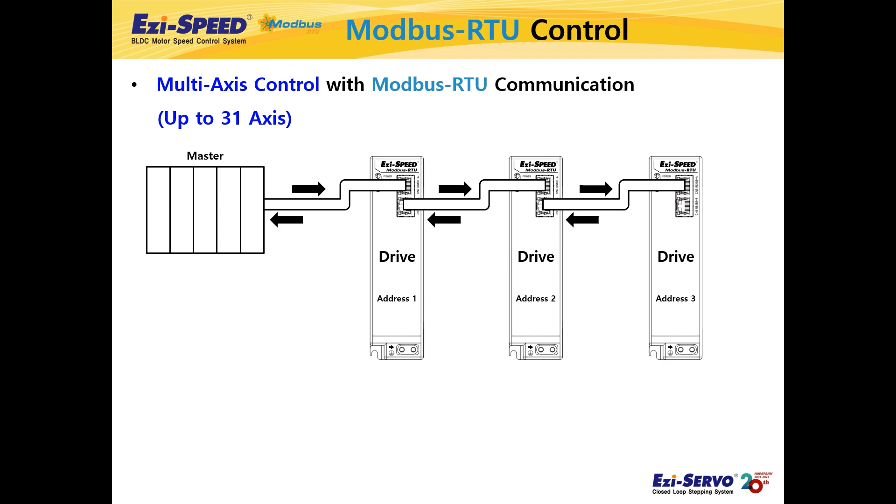Up to 31 drives can be connected to one master controller. The master controller can send commands to each drive independently, one at a time, or send commands to multiple drives simultaneously through broadcast or group commands. As an example, I will show a demo connecting two drives using the HMI as the master. As you can see, each drive can be controlled independently from the master. Ezi-SPEED Modbus-RTU provides a group operation function, allowing you to control two drives simultaneously.

Additionally, Ezi-SPEED Modbus-RTU provides a control interface that connects Modbus-RTU network control, I/O control, and PC support software via USB. First, I/O control can be connected to an external switch or PLC through an I/O input-output cable to configure an operation system through I/O. By setting the necessary functions for input and output, the user can drive with functions such as up to 16 speed operation, emergency stop, and torque limit. It also provides the ability to set the speed using analog.

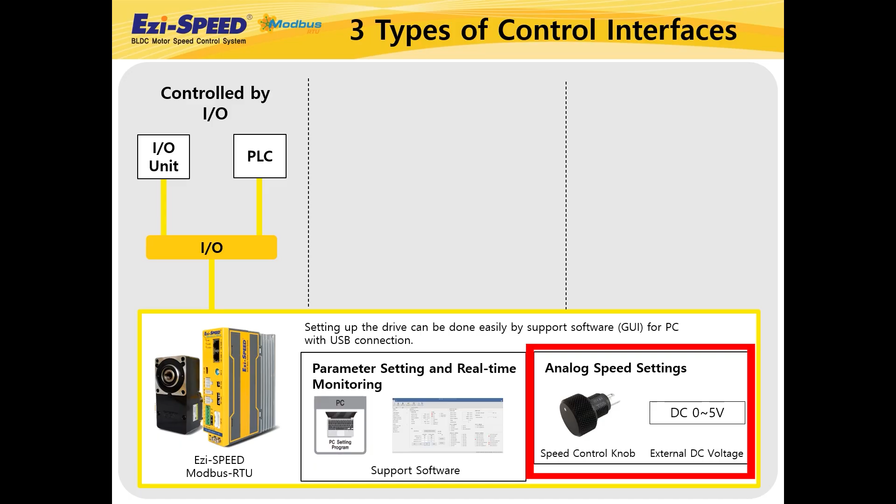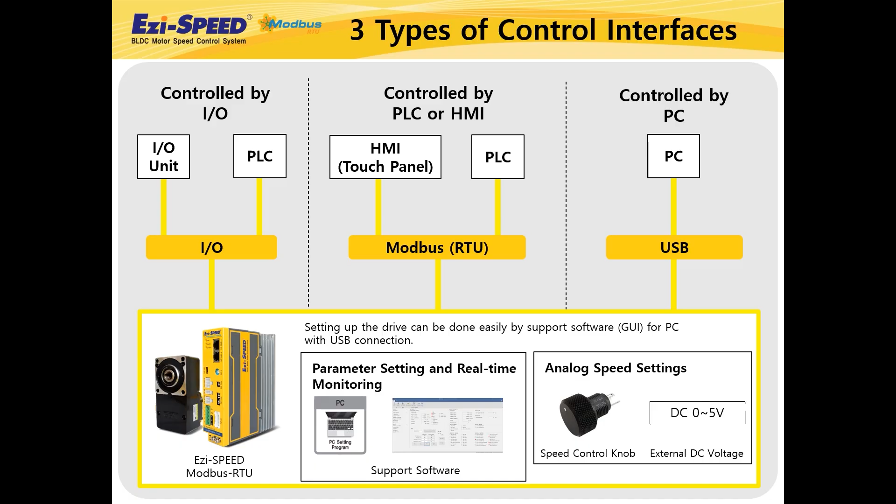Next is network control using the RS-485-based Modbus-RTU protocol. You can control the drive by connecting a master such as a PLC or HMI that supports Modbus-RTU. Up to 31 drivers can be connected to one master. Each axis can be operated separately, and multiple axes can be operated simultaneously through group control. Support software for PC is provided, allowing you to quickly and easily set various drive parameters or test operation.

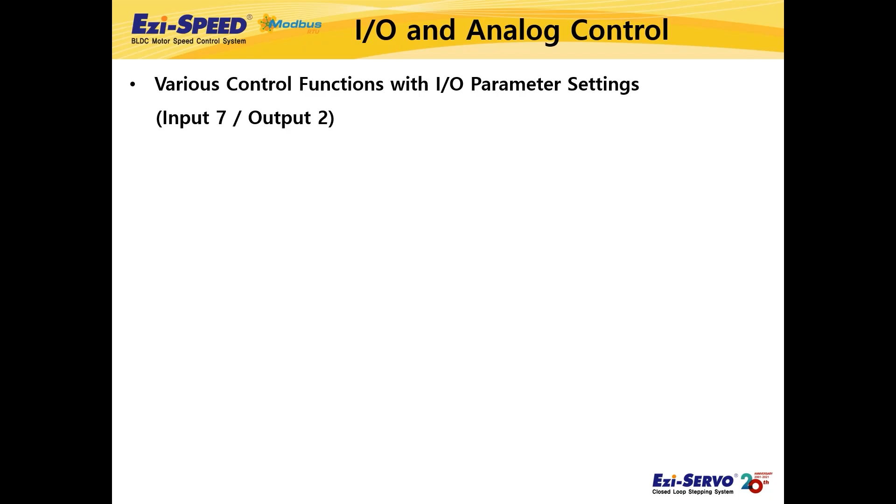Let us introduce I/O control in more detail. Ezi-SPEED Modbus-RTU supports 7 inputs and 2 outputs and can also be controlled analogously through a variable resistor or external voltage. Ezi-SPEED Modbus-RTU allows users to set various functions to 7 input and 2 output signals. It is possible to control the motor's start, stop, rotation direction change, torque limit release, and multi-speed operation.

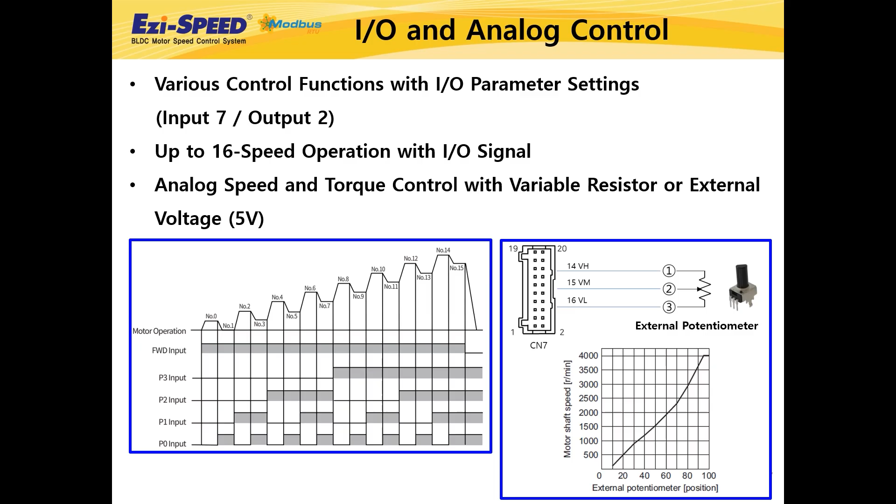It provides 16 types of operation data consisting of rotation speed, torque, acceleration time, and deceleration time, and operation at up to 16 speeds is possible. Parameters and operation data can be easily set through PC support software. Continuous analog speed control or torque control is possible through variable resistor or external voltage. Offset and maximum values can be set and precision can be adjusted through parameters.

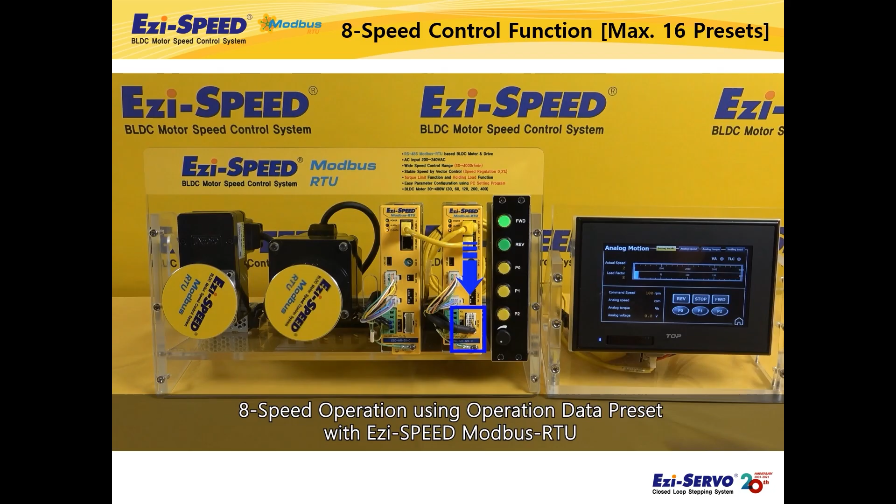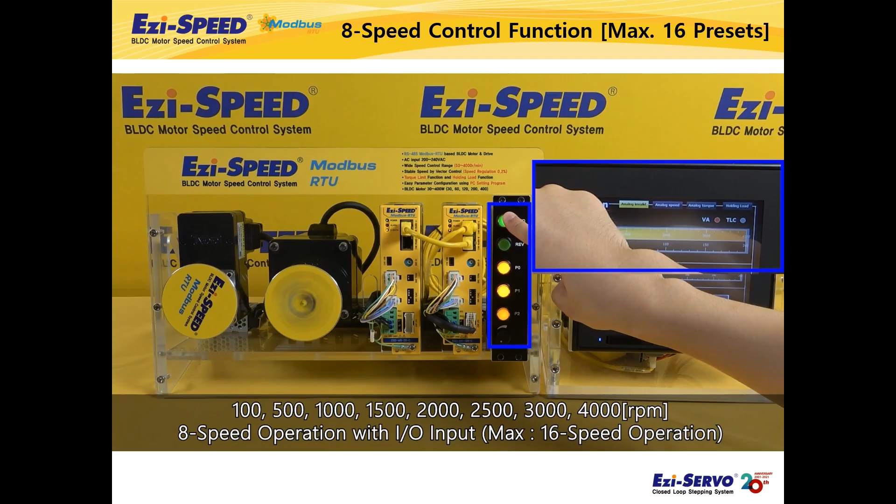As an example of the I/O control function, I will show a demo of 8-speed control using a switch as I/O. The 3 yellow switches are connected to functions P0, P1, and P2 respectively. You can select 8 operation data with on-off combination. When using up to P3, up to 16 operation data can be selected. The currently set operating data are 100, 500, 1000, 1500, 2000, 2500, 3000, and 4000 revolutions per minute in that order. You can also control the speed of the motor via analog input with the volume knob.

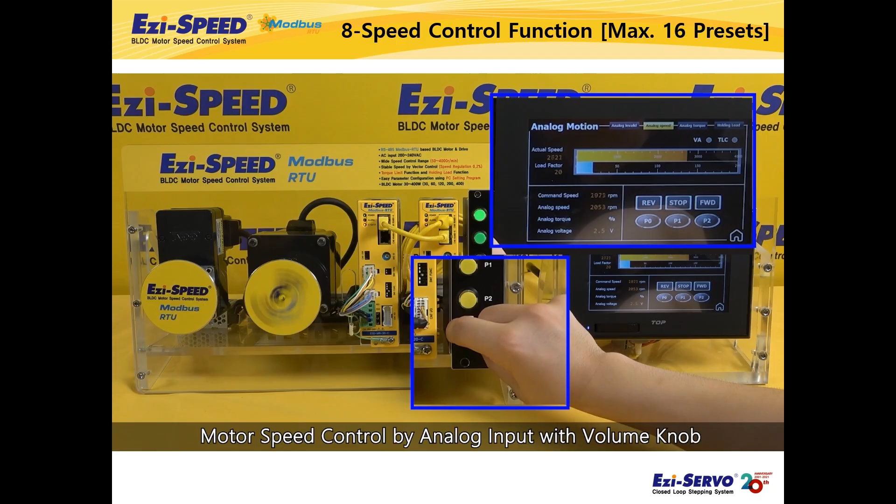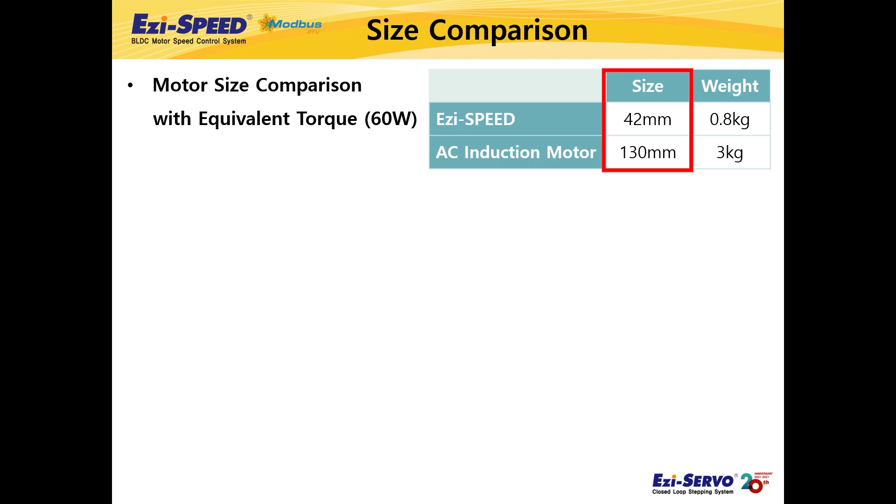An Ezi-SPEED Modbus-RTU has a compact size and high torque by adopting a small, high-efficiency brushless motor. For example, when compared with the same output, the 60-watt standard size of the Ezi-SPEED is compact at 42 mm. AC induction motors are relatively large at 130 mm. Ezi-SPEED weighs only 0.8 kg and the AC induction motor weighs 3 kg, making the Ezi-SPEED lightweight.

And since AC induction motors often have a fan mounted behind the motor, the size difference is almost 3 times that of Ezi-SPEED motor. Therefore, using Ezi-SPEED, machine size will be much smaller. Additionally, Ezi-SPEED can produce higher torque than AC induction motors despite its compact motor size. In particular, in the case of AC induction motors, torque drops at low speeds, while Ezi-SPEED consistently produces high torque at both low and high speeds due to the characteristics of BLDC motors. I will explain it with a torque graph later on.

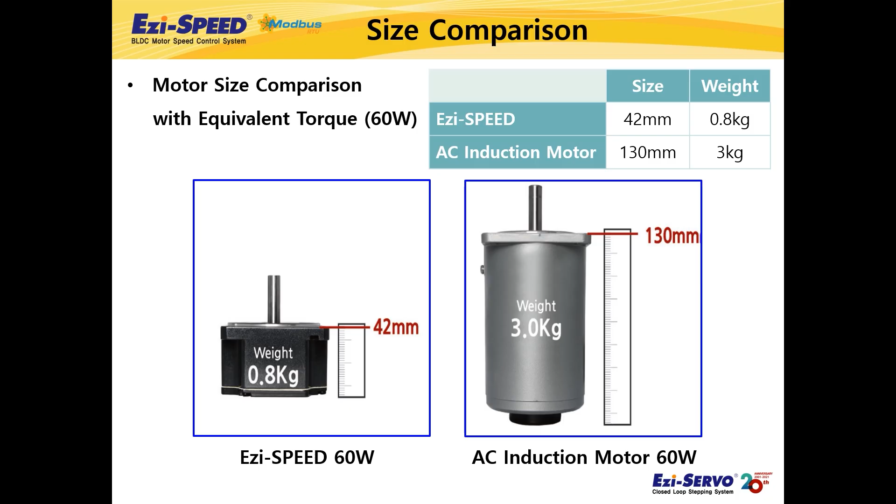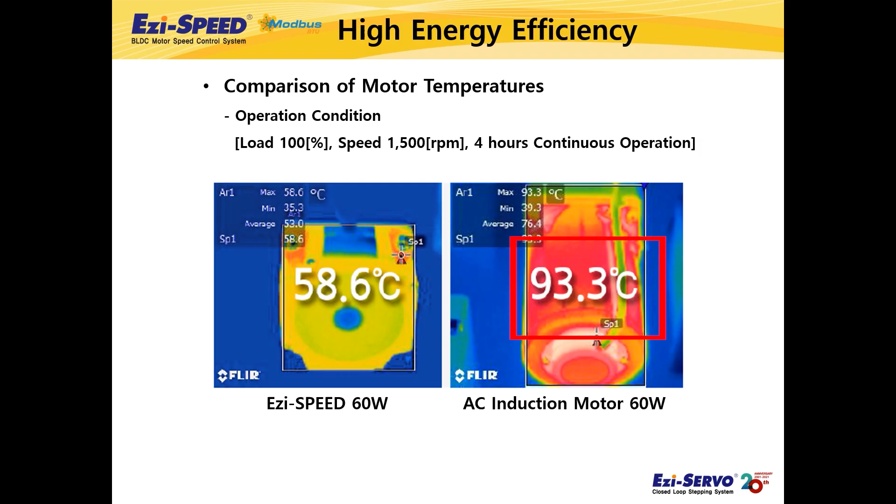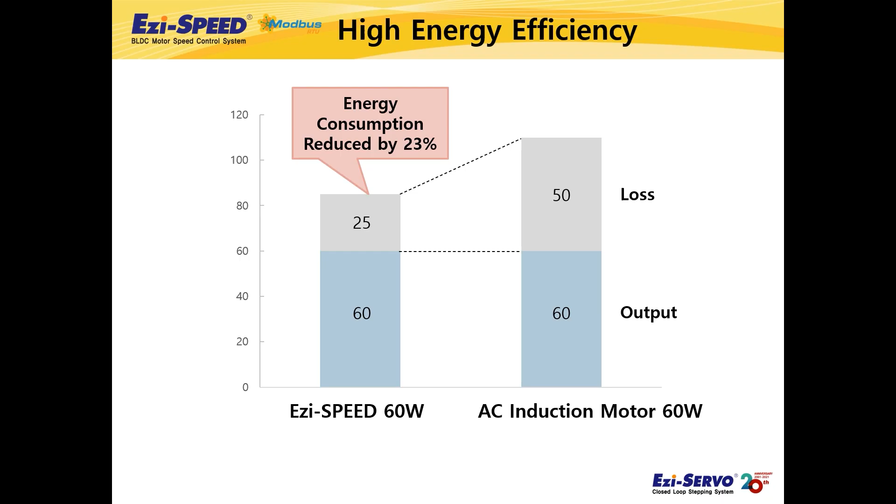Additionally, brushless motors have high energy efficiency by using permanent magnets to suppress secondary losses in the rotor. When replacing the AC induction motor with the Ezi-SPEED series, when operating continuously for 4 hours at 100% load and speed of 1500 revolutions per minute, the temperature of the Ezi-SPEED motor is 58.6 degrees, and the temperature of the AC induction motor is 93.3 degrees. You can see that the temperature of the Ezi-SPEED motor is lower. Accordingly, in terms of energy saving, Ezi-SPEED products can reduce power consumption by about 23% compared to AC induction motors.

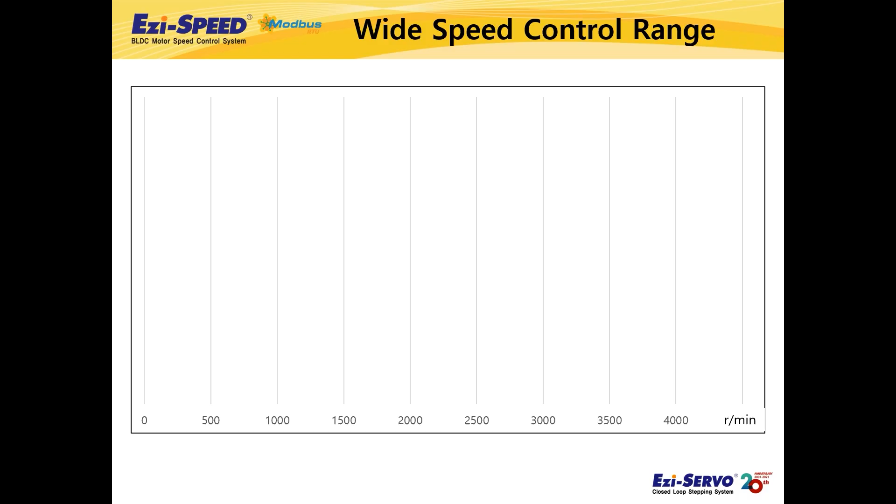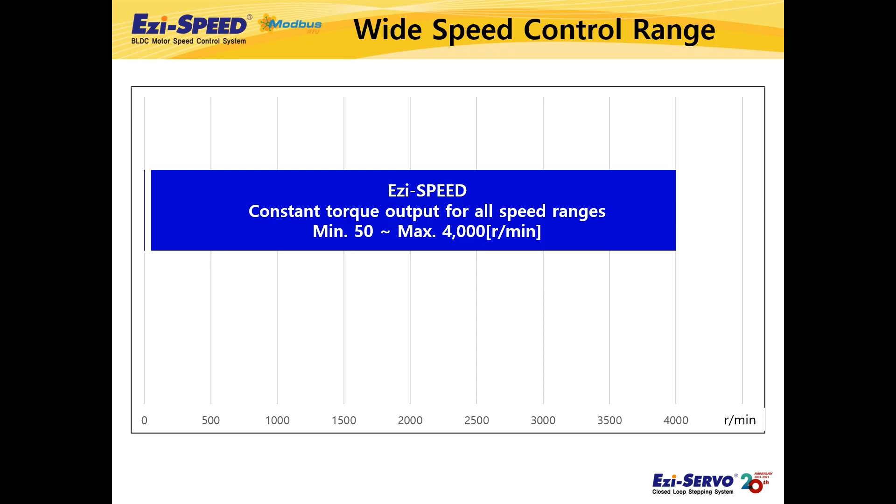Next, Ezi-SPEED Modbus-RTU products can control a wide range of speeds. In addition, it has high-speed stability by controlling the motor with vector control technique. Let me explain it with a graph. Ezi-SPEED can be controlled from a minimum of 50 revolutions per minute to a maximum of 4000 revolutions per minute, and consistently produces high torque from low to high speeds.

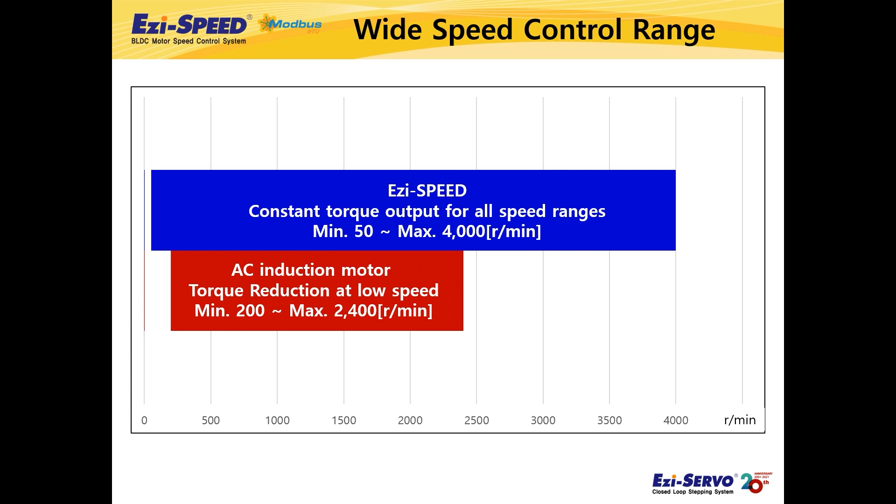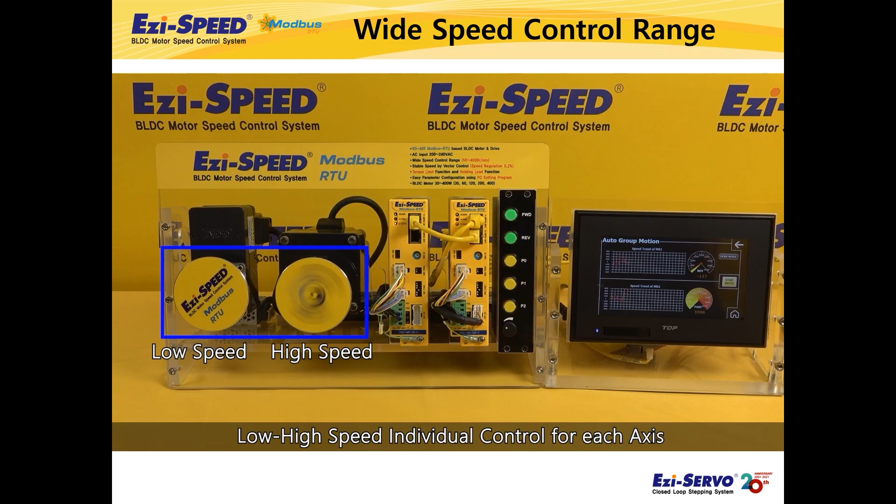As an example, we will demonstrate stable control of a wide speed range with 2 drives. You can see that they operate stably even at a maximum speed of 4000 revolutions per minute and a minimum speed of 50 revolutions per minute, respectively.

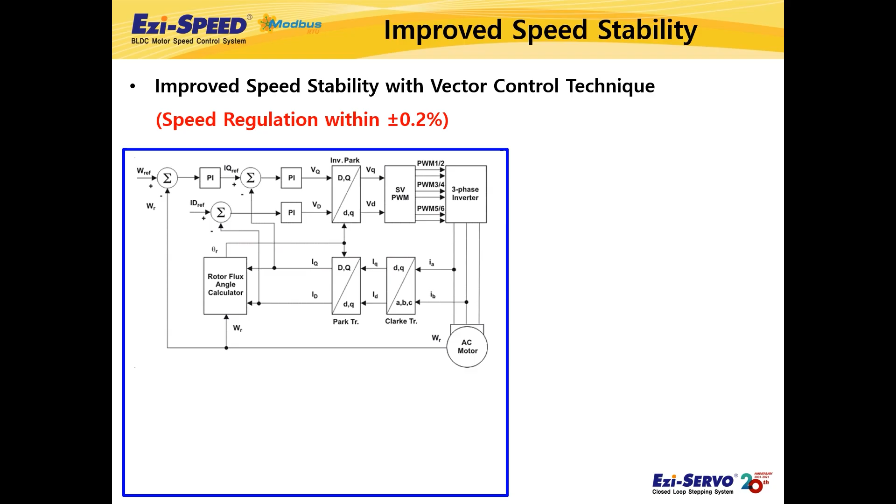Ezi-SPEED Modbus-RTU controls the motor through vector control technique to achieve high speed stability. The vector control technique is called field-oriented control and is a method of controlling the rotation of the magnetic field vector by the stator with current. Because the size and direction of the magnetic field can be precisely controlled, the motor's torque and speed stability are higher than with existing control methods. Ezi-SPEED Modbus-RTU has high speed stability with a speed fluctuation rate within 0.2%. And Ezi-SPEED Modbus-RTU provides torque limit function and load holding function. We will briefly explain each function in the next chapter.

First is the torque limit function. This function suppresses the torque generated by the motor so that it does not exceed the value desired by the user by limiting the current flowing through the motor. The setting value of 100% is the rated torque, and the torque limit can be set from 0 to 200%. This prevents applying more force than necessary.

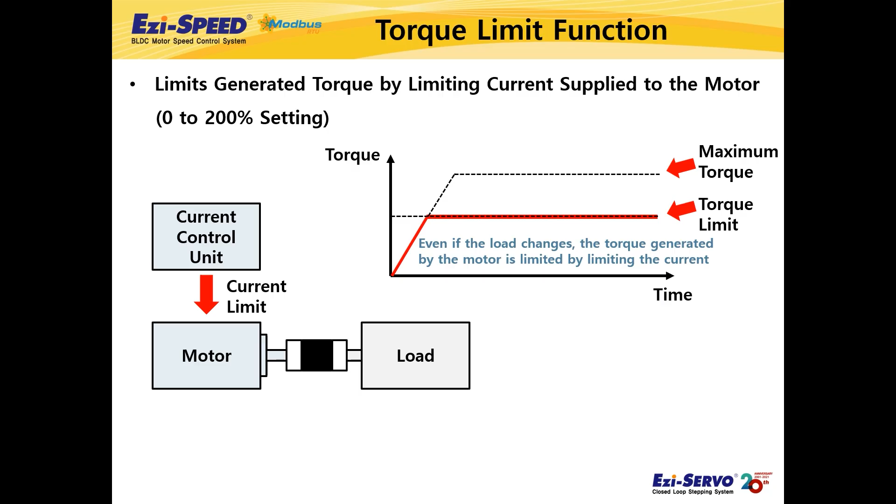For example, you can set the torque limit slightly higher than the torque required for the applied load to prevent operator injury from excessive motor torque. This function can be applied to AGVs, conveyors, agitators, etc. where speed control systems are used. The torque limit function can also be set using analog input. We will demonstrate how to adjust the torque limit value using the volume knob.

The torque limit function is a function that limits the current flowing in the motor to prevent the motor torque from exceeding the torque limit value. Therefore, if an external force exceeding the torque limit value is applied, the motor torque cannot exceed this and the motor cannot operate. At this time, if the torque limit value is higher than the external force, the motor torque exceeds the external force and the motor runs again.

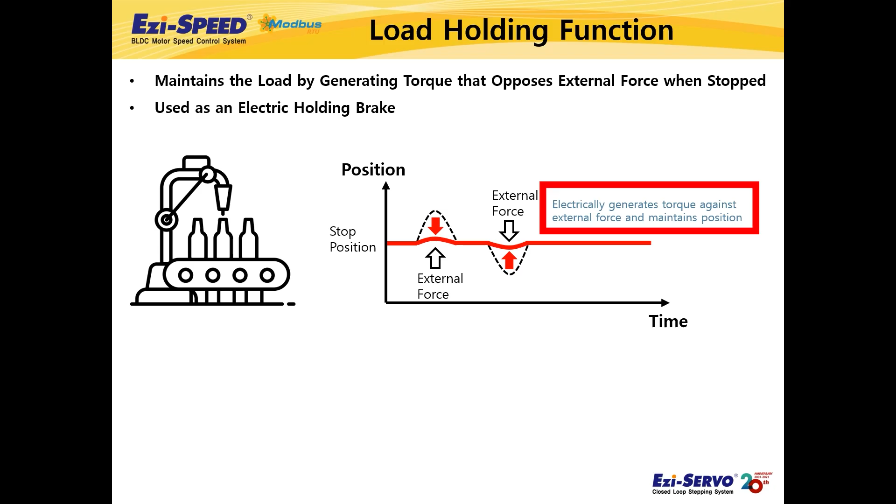Next is the load holding function. This function maintains the current position through an appropriate force even when stopped. When an external force is applied when stopped, the position is maintained by generating an appropriate torque. It can be used as an electric holding brake when the motor is at standstill, even without a mechanical brake. For example, when working on a belt while the conveyor is stopped frequently, the load holding function can be used to prevent the workpieces from shaking.

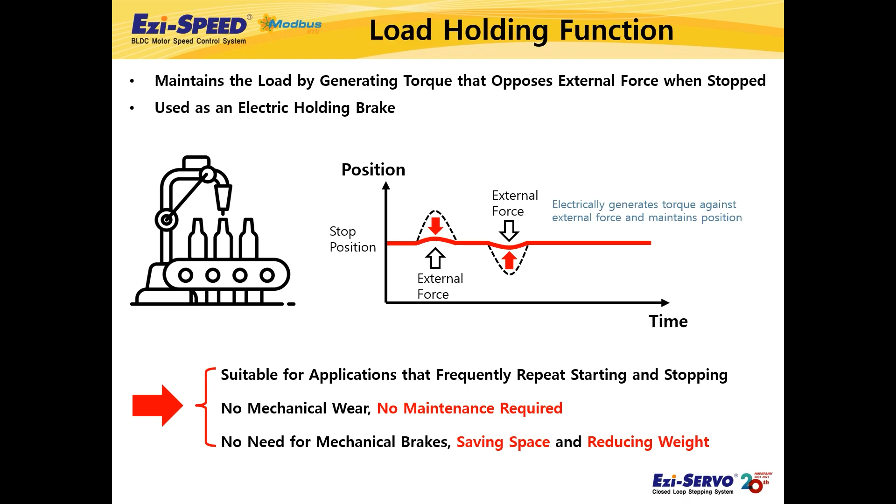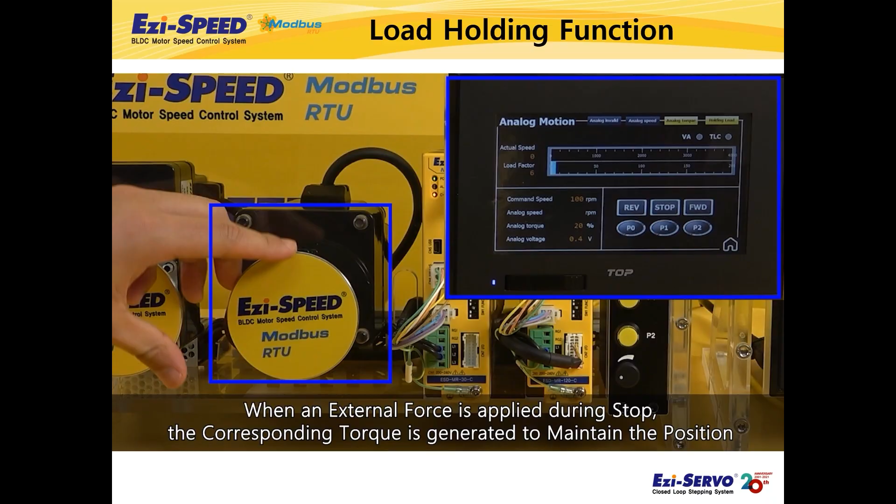Unlike mechanical brakes, maintenance is not required as there are no mechanical wear parts, and space is saved and weight is reduced. Next, we will demonstrate the load holding feature with the demo kit. When an external force is applied to a standstill motor, you can see that the motor maintains its position by generating opposing torque. It can act as an electrical holding brake without a mechanical brake.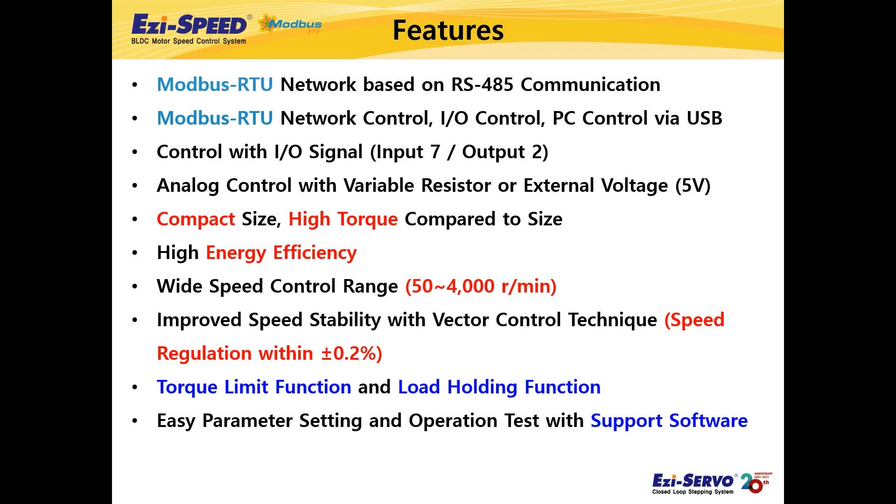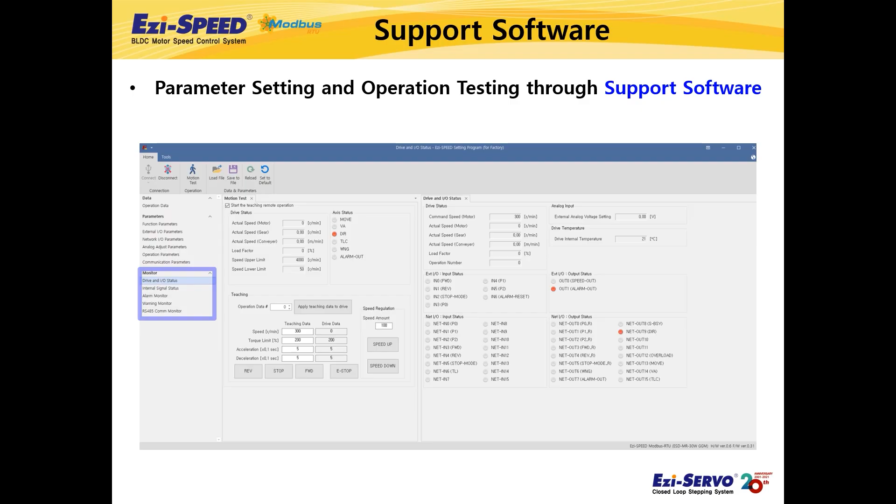Lastly, you can easily set product parameters and test operation with the support software provided by FASTECH. The drive and PC can be simply connected via USB port. The support software provided by FASTECH supports various functions. There are parameter setting function, monitor function, and operation test function. We will explain each function with a demo kit.

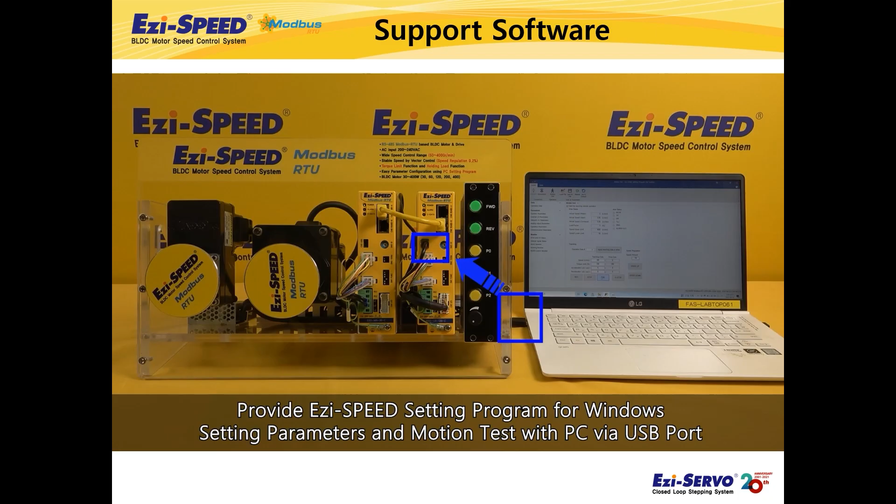As you can see, you can connect the drive's USB port to your PC using USB 2.0 mini Type B cable. With the support software, you can easily set all parameters. Additionally, the monitor function allows you to check the internal status of the drive and motor, alarms, and other status at a glance. Lastly, the motion test function allows you to easily test whether the motor and drive are operating normally.

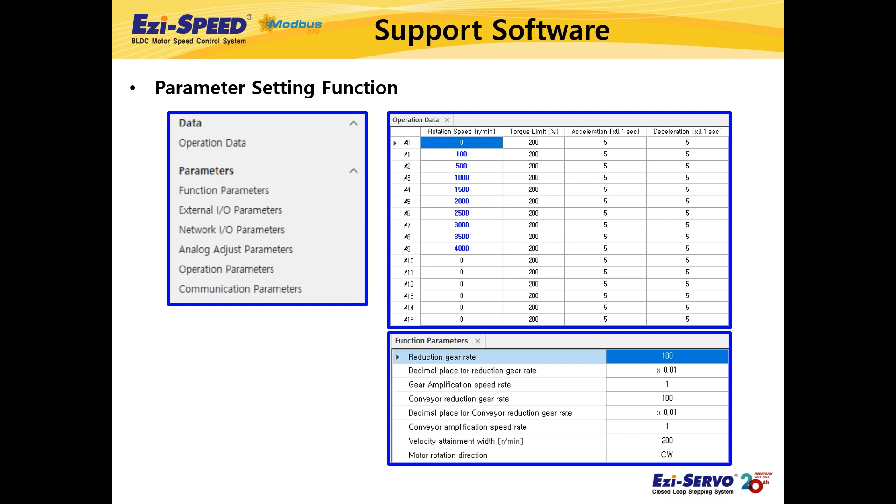First, with the parameter setting function, you can easily modify and save parameters for motor operation or various functions. In addition to 16 operation data including rotation speed, torque limit, acceleration time, and deceleration time, all parameters can be set easily and quickly with the support software. The set values can be saved as a parameter file so that the settings can be quickly copied to multiple drives. The following shows an example of setting operation data in the support software.

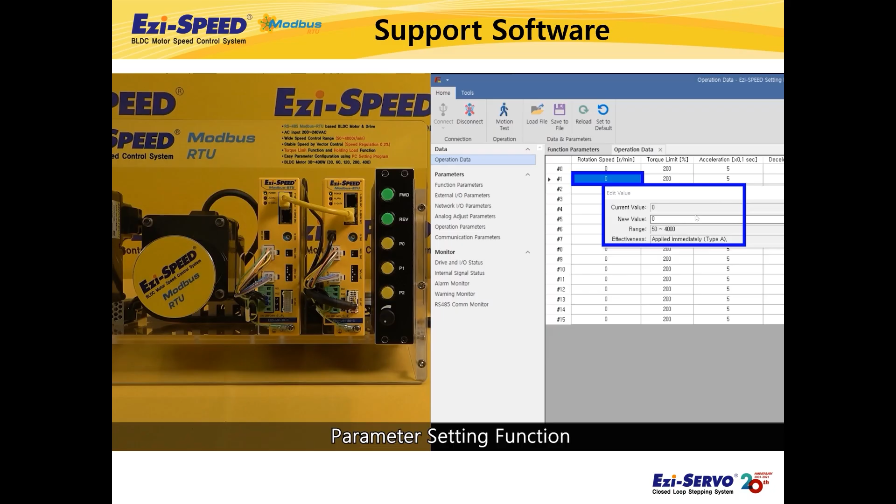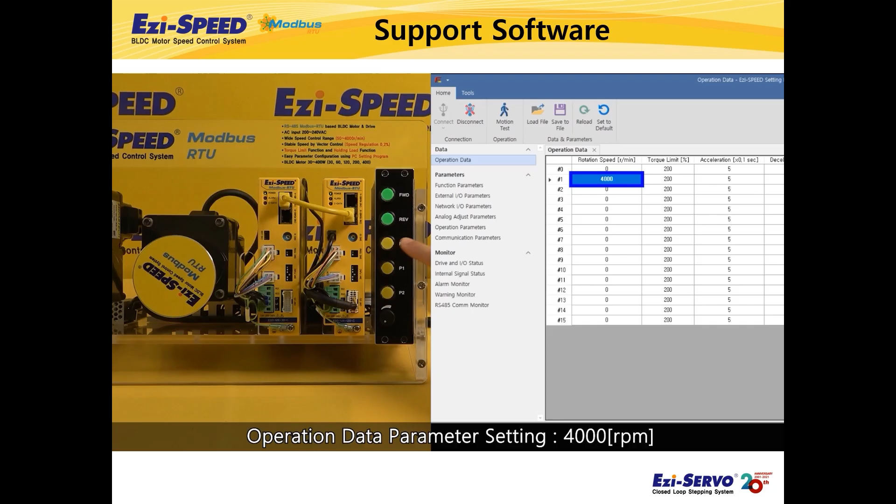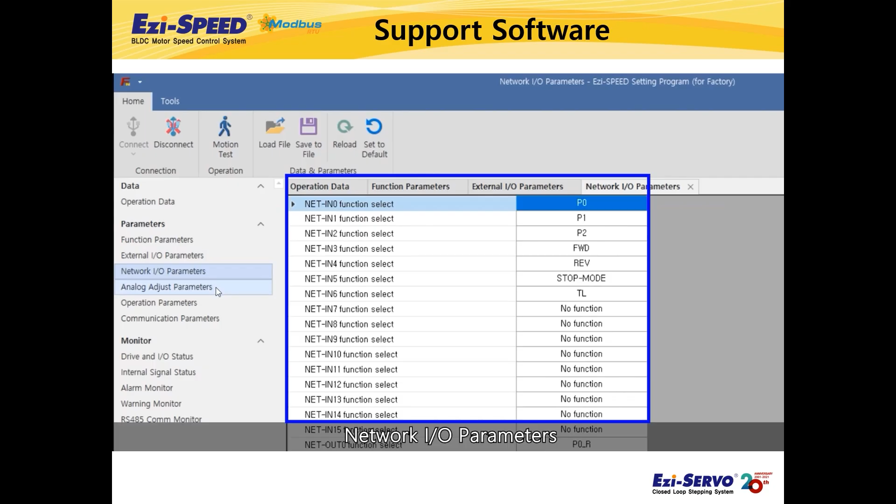You can also load saved parameter files and set operating data at once. All parameters can be modified in the support software, including function setting parameters, external I/O parameters, network I/O parameters, analog adjustment parameters, operation setting parameters, and communication parameters.

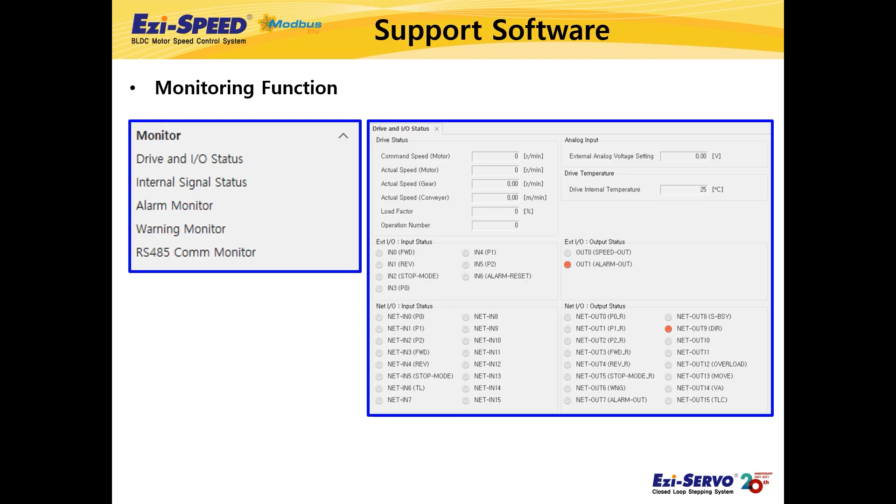Additionally, the monitor function allows you to monitor the status of drives, motors, and external I/O in real time. You can easily check the current rotation speed, load rate, input signal, alarm history, etc. The following is an example of the monitoring function during I/O control. As you can see, you can monitor command speed, actual speed, load rate, etc. in real time.

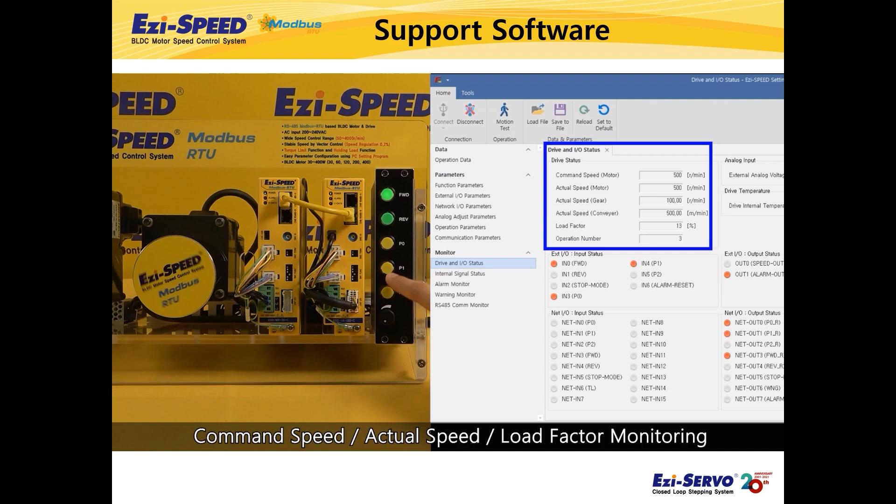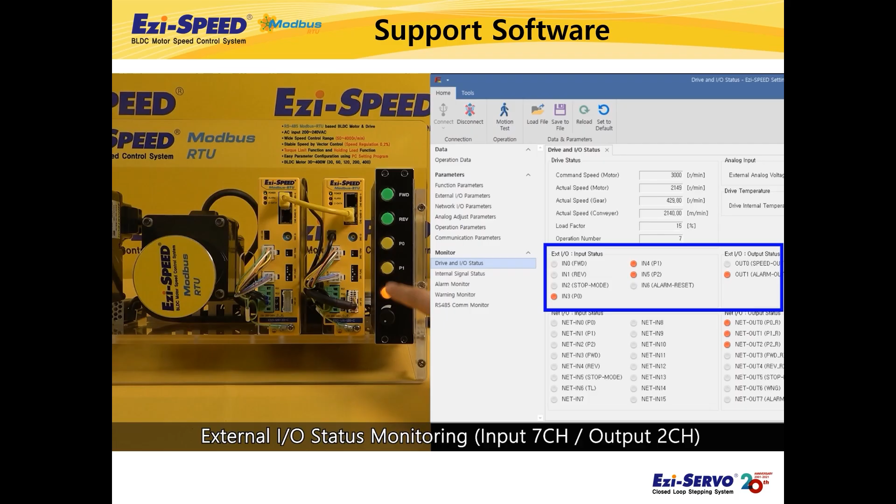Additionally, the status of I/O switches can also be monitored on a PC in real time. Also, you can monitor alarms, warnings, and communication errors, and check alarm records along with causes and actions.

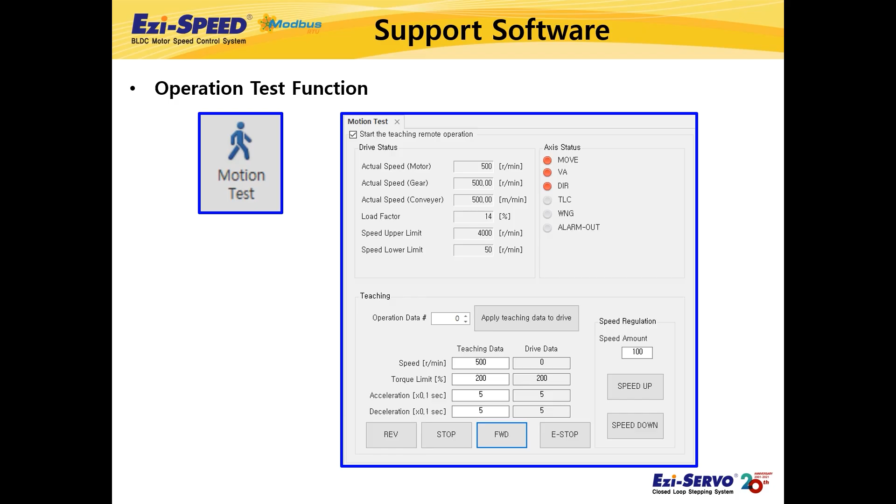Additionally, it provides a motion test function so you can simply drive the motor. It also provides a teaching function that applies motion data to operation data, so you can test it and set the operation data right away. We will demonstrate motion test function of the support software by controlling a motor.

The motion test function allows you to check whether the motor operates normally through a PC without a separate external I/O device or network master. As you can see, motor operation tests such as speed control, direction change, and sudden stop are possible.

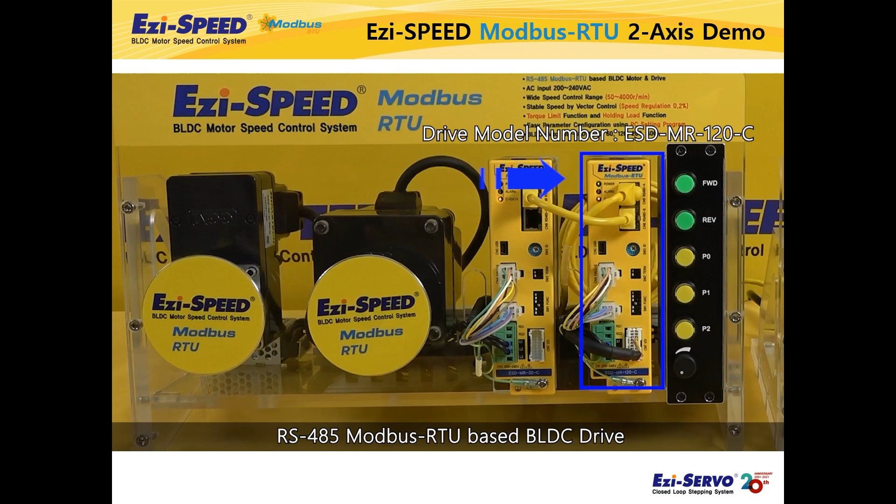Lastly, we will show a demo kit of the Ezi-SPEED Modbus-RTU product. The products and specifications used are as follows. A BLDC speed control drive based on RS-485 Modbus-RTU was used, and these are the drives for 30 watt and 120 watt, respectively. Additionally, the motors corresponding to each drive have a hollow shaft flat gearbox and a parallel shaft gearbox.

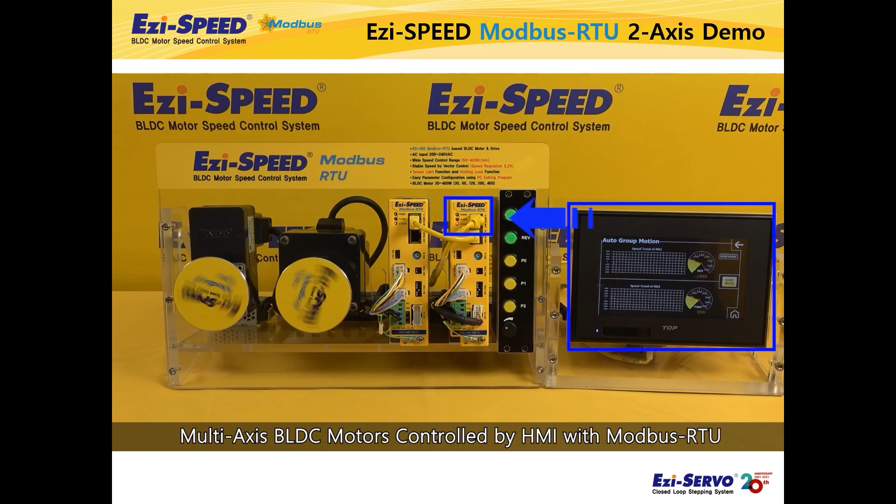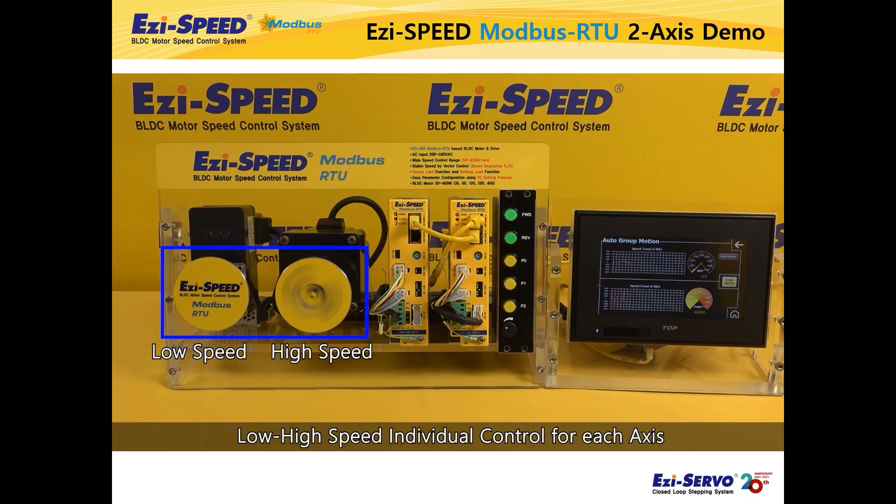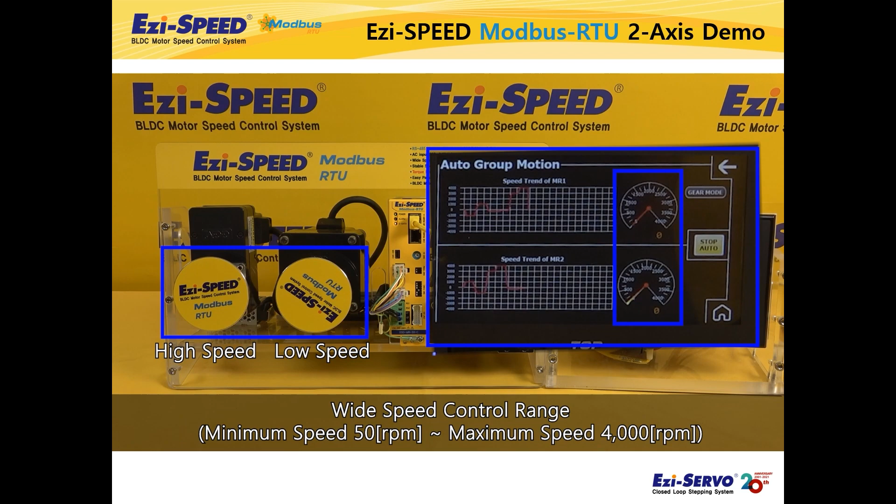The HMI and 2 drives are connected via daisy chain RS-485 cable, and up to 31 drives can be connected and used. Using HMI as a Modbus-RTU master, you can control multiple axes drives through network communication. Additionally, the motor used is a BLDC motor and can be controlled over a wide speed range from a minimum speed of 50 revolutions per minute to a maximum speed of 4,000 revolutions per minute. 2 connected motors can be controlled independently through network communication, or they can be controlled simultaneously by setting up a group.

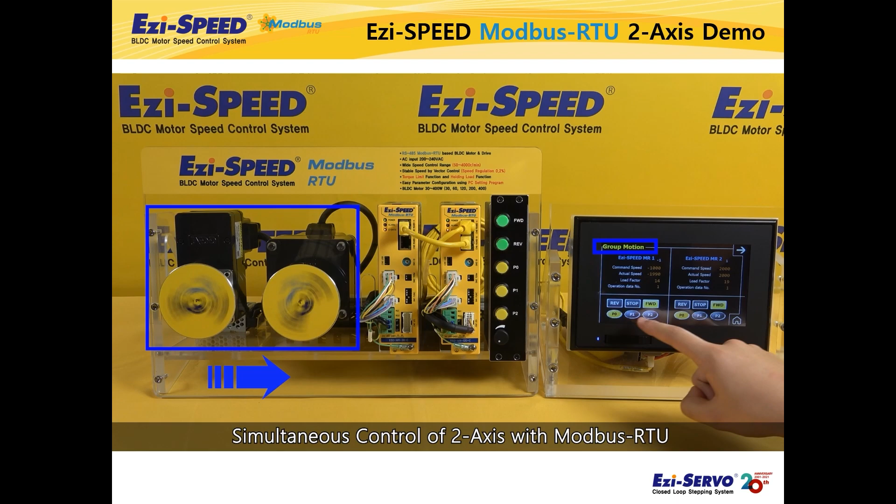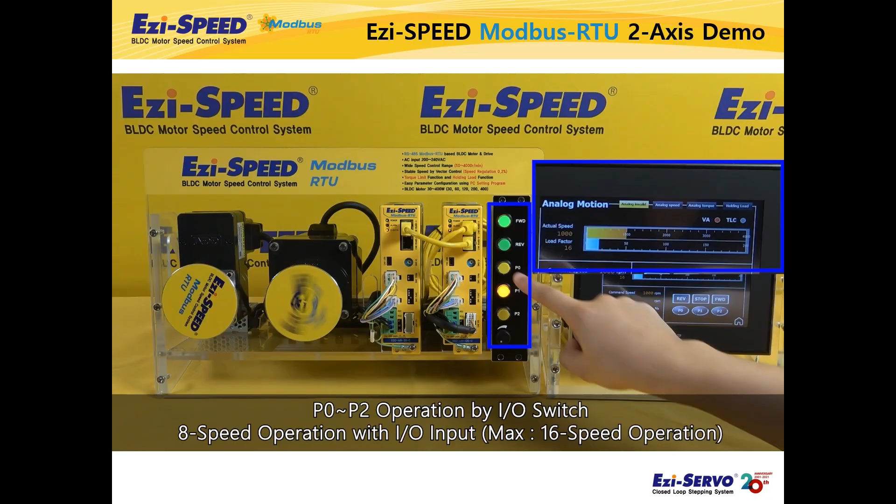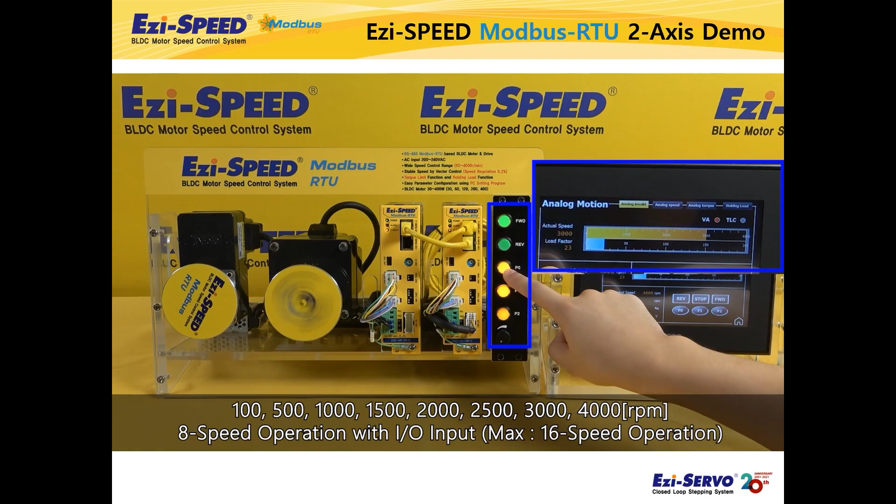The motor can also be controlled through an externally attached I/O switch, which shows 8-speed operation by combining P0, P1, and P2 set to the 3 yellow switches. The speed value of the operation data can also be controlled continuously in analog form through the volume knob.

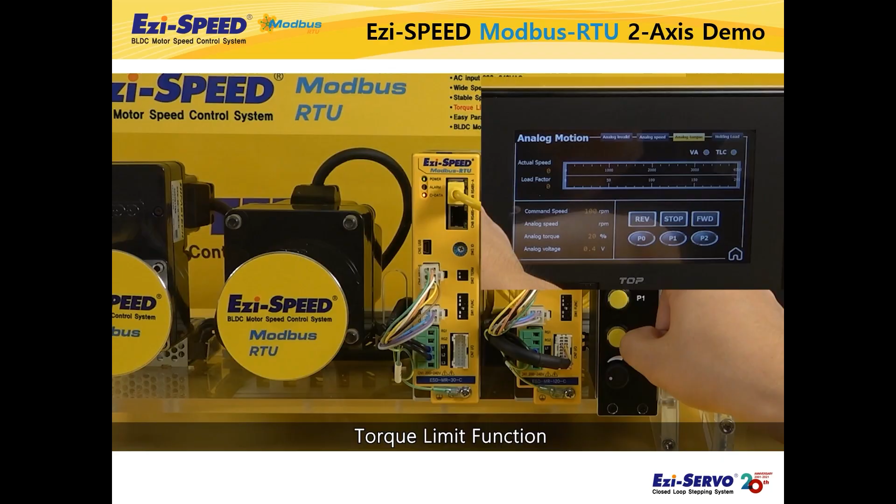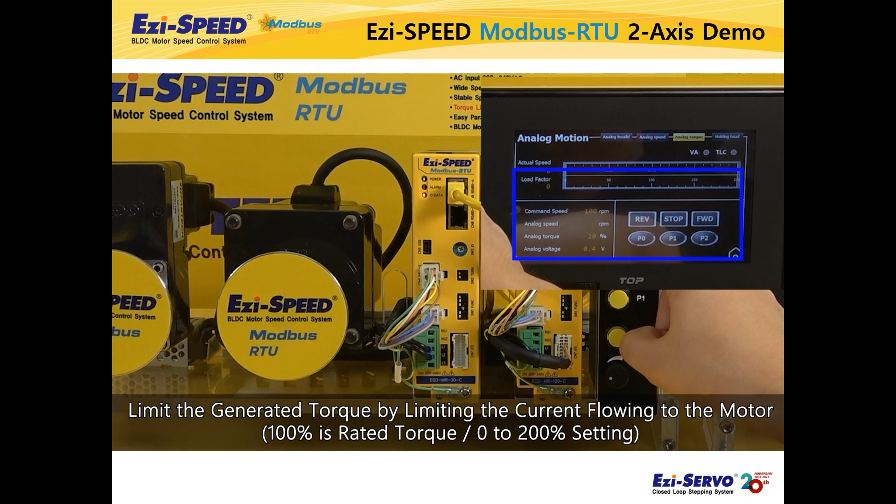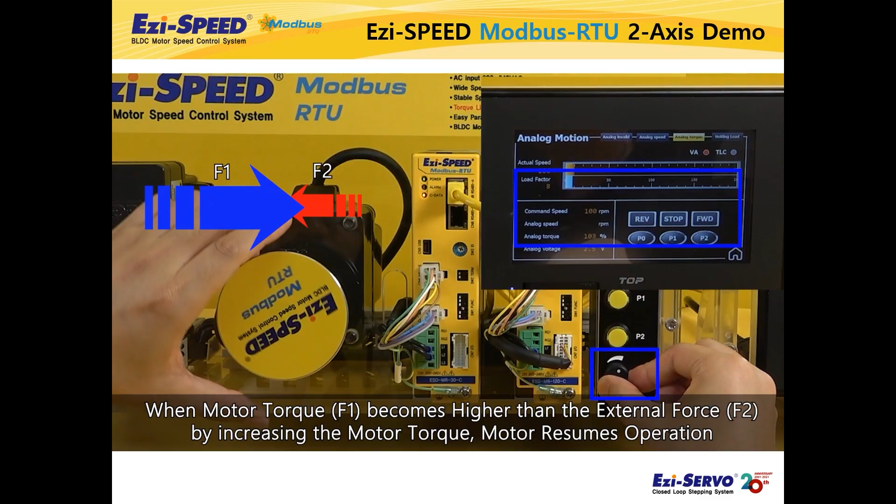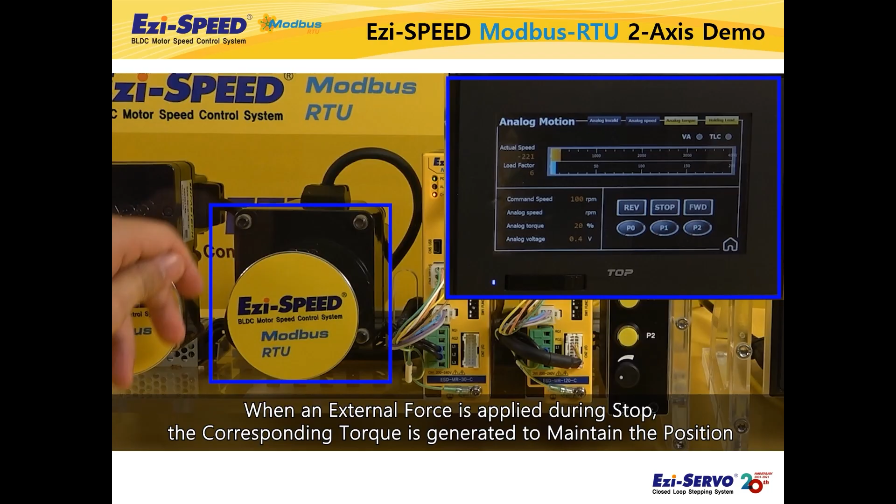The torque limit value of the operation data can also be controlled analogously through the volume knob, and the correlation between external force and torque limit value can be checked through the following operation. Ezi-SPEED Modbus-RTU provides a load holding function, allowing it to maintain its position even when stopped using electrical power.

This concludes the product introduction of Ezi-SPEED Modbus-RTU, a Modbus-RTU-based BLDC speed control system.